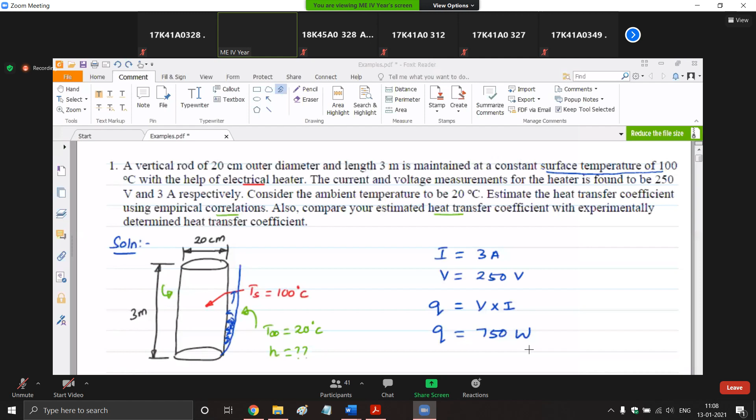Good morning. Sir, yes. By seeing the question, can you please explain how to approach the question, how to solve it?

Yeah, sure, we'll do that in this session. I'll go step by step, I'll try to go slowly. I will go through the question so that you get how to solve it. Okay, we'll do it slowly.

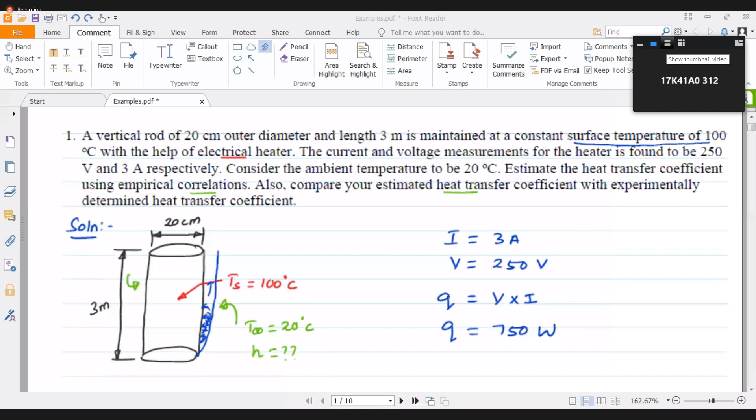So can you give me some basic inputs, sir, so that we can understand very easily? What do you mean by basic inputs? Which means where we have to take specified parameters like CP, FG value. We'll discuss it here, if you have any doubts you can ask. Sure, sir, thank you. Okay, I'll try to break it down as simple as possible.

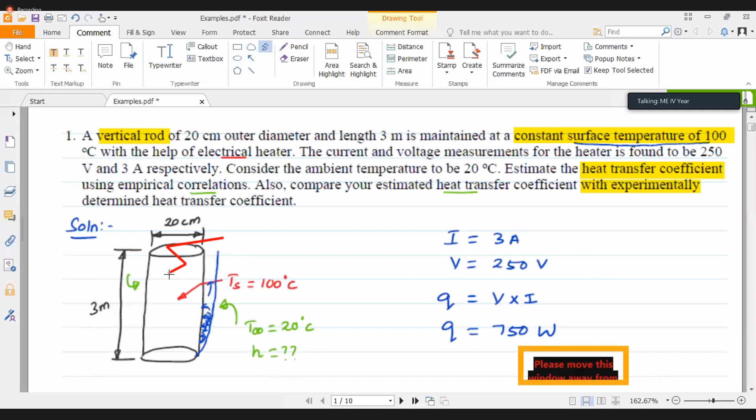So we draw a heater. The input to the heater is given, so you draw V and I, as we have done here, and give the values of V and I. What else is given? It's also given that it's maintained at a constant surface temperature of 100 degrees centigrade, and the ambient temperature is 20 degrees centigrade.

So first of all we have to think about which mode of heat transfer it falls into. There is heat transfer from a solid surface to a fluid, which is nothing but air. So there is convection here — the mode of heat transfer is convection. So first thing we know is it is due to convection.

But which convection is it — free or forced? Is any data given like flow of air over it? No, right? There is no flow of air given anywhere in the question. So this is nothing but free or natural convection.

So you may even improve the diagram — you can draw gravity acting downwards. So this is what is given. Is the question clear to everyone? We have a vertical rod, so it is vertical, not horizontal.

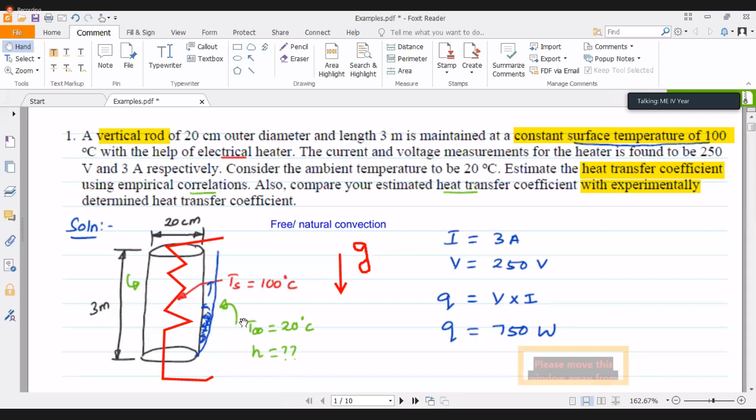We find the properties of air at the film temperature, which is nothing but the average of the surface and ambient temperature. Since the surrounding fluid here is air, the film temperature is the average of the surface temperature and ambient temperature, which is 60 degrees centigrade. So at 60 degrees centigrade we are supposed to find the thermophysical properties of air from the data book — if you open the contents of your data book, you'll see the property values.

Okay, under property values, you have to look for vapors and gases. So once you go to the corresponding page in your data book, whichever edition you are using, go to the contents page, look for property values. Under property values, look for gases and vapors. In the 6th edition, it's on page 33.

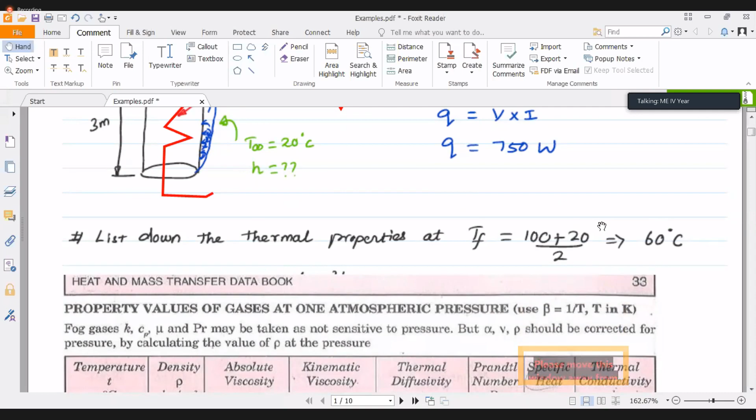So at 60 degrees centigrade, that is at the film temperature, which is the average of surface and ambient temperature, we find the properties at 60 degrees centigrade for air. So the density, viscosity, thermal conductivity, and Prandtl number values are given. I hope you can find this in your data book.

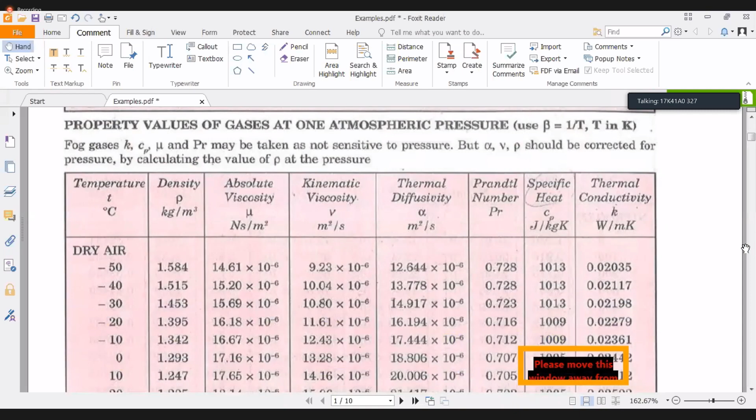Can you get hold of this in your data book? Yes sir, yes sir, I found it. Okay, I hope everyone has got it.

So at this we find the properties. What we have taken, you can take nu, that is the kinematic viscosity, or you can take density and mu, that is also fine. You know the Prandtl number value here is 0.696, and the K value.

I urge you to note it down because it's also your assignment problem, so you can finish one of the assignment problems. I hope everyone is noting down. Yes, yes sir, of course.

Okay, so these are the properties. I hope till now there is no doubt in this, right?

First thing is we found out it is free or natural convection. We found this is for a vertical rod, and the temperatures are already given. From that we found the film temperature, and from that using the data book we have found these properties.

I hope it is clear till now. Any doubts here? No, sir. No, sir. Okay, then fine.

So we find the Grashof number here, because for natural convection, the Grashof number and Prandtl number are the important parameters. If you don't know what number to find, since it's free convection, open your data book, go to convection contents, go to free convection in that, and see what numbers are appearing there, or for the correlations given, what number ranges are required. Generally for free convection we require the Grashof number and Prandtl number.

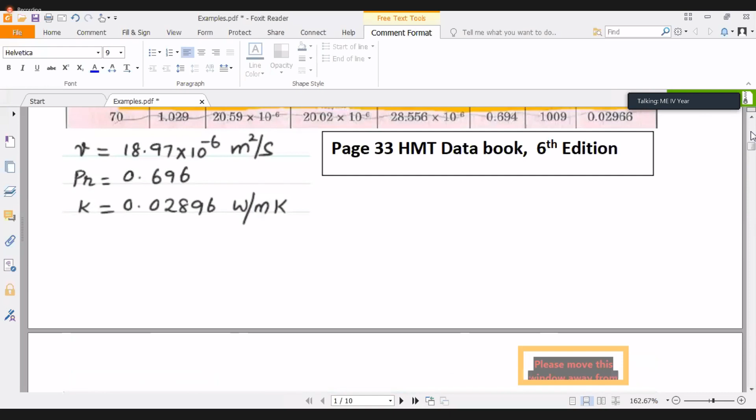And the viscosity value, that is the kinematic viscosity value, we have already found from the data book. It's given by this value 18.97 into 10 raised to minus 6. If you found density and mu, you can also use that to find kinematic viscosity.

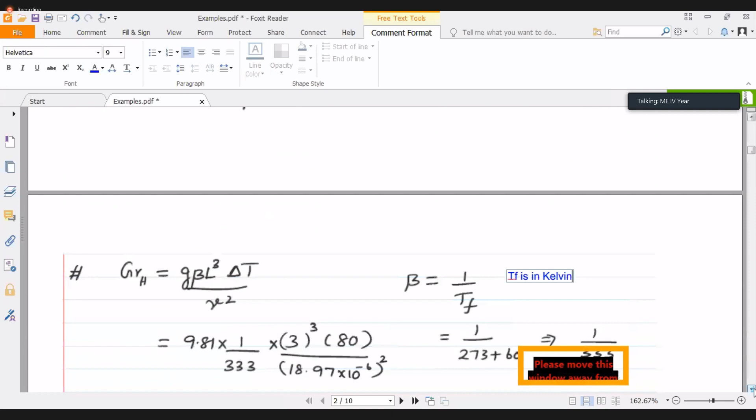Anything is fine. So once we got all these, we plug in the g value. The beta value is nothing but 1 by the film temperature in Kelvin. It's important to take it in Kelvin. It's only for air; for others, the beta values are separately given in the data book again.

The length is the characteristic length, into the temperature difference, and the kinematic viscosity squared. So from this we get our Grashof number value. I hope you get this value, you can calculate and check. I'm not sure whether it's right or wrong, so please check. Now we have to find the Grashof number and Prandtl number ratio.

Sir, yes, go, yes. So you said that for air, beta will be 1 by TF, no sir? Yes. And for other liquids such as water and other things, how could we find the beta, sir? They are given in the data book in some other table.

You want me to specifically tell the page number? I'll put it in your group later. Otherwise, at the end of the class, I will look into the data book and tell you.

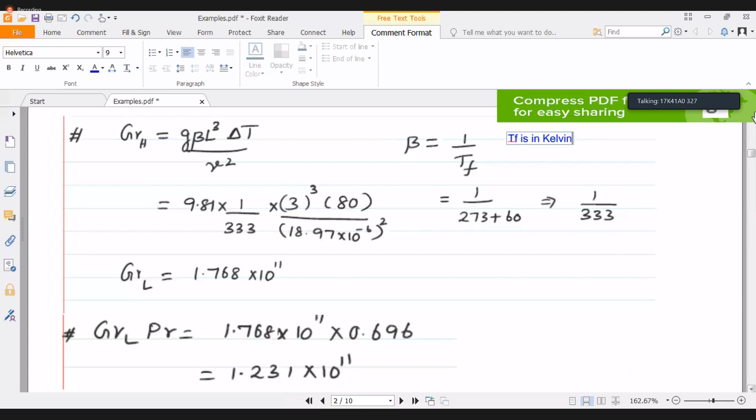So sir, where do we have to take the Prandtl number? It's here only, right, in the properties table. See, this is your Prandtl number. If you go up, this is Prandtl number, right? Is it clear?

Is it clear? Yes sir, it's given. In case Prandtl number is not given, you can find it from mu, Cp and K. Prandtl number is nothing but mu Cp by K. You have mu here, you have Cp values, you can use K values and get that. Mostly Prandtl number will be given in the properties though.

So we find the GrPr ratio. So we need to remember the Grashof number formula. If we couldn't remember the Grashof number formula, where can we find it in the data book, sir?

I think in the correlation itself you will find it, in the free convection section it is given. We'll go to that, I'll show you. But actually you should get hold of the formula. In case not, you can use the data book.

I don't know how they permit the data book, how limited it is in your exams. So it's better to get hold of the idea of the Grashof number. Anyway, it will be there, we'll look into it. So we've got the Grashof number and Prandtl number value.

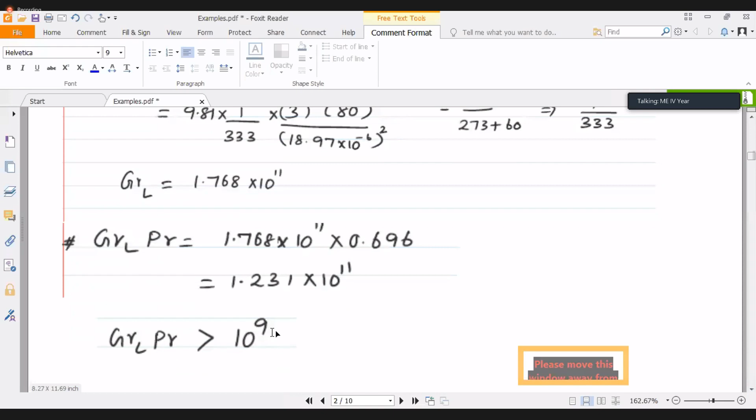So what we do is check: it is greater than 10 power 9. I have written it for some reason, we'll look into the reason now. So we know that flow is turbulent because this is greater than 10 power 9.

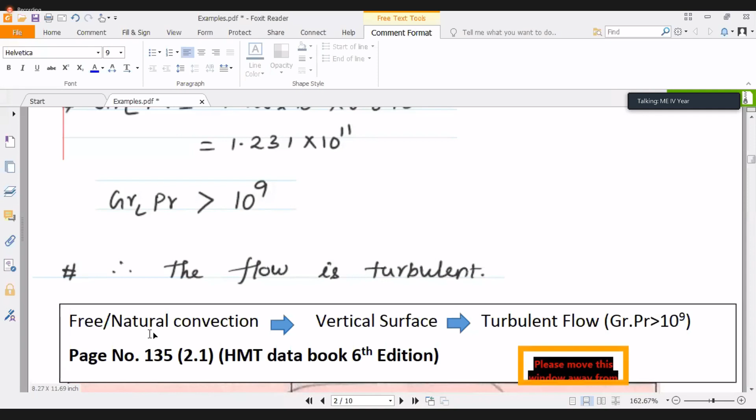So you go to your free or natural convection section in your data book, go to the contents page. Under convection, look for free or natural convection. And how is the geometry of our surface? It's a vertical rod, right?

And you know the GrPr value. Forget whether it's turbulent or not, but you know the range, right? It is greater than 10 power 9, or whatever value you have — it is 1.231 into 10 power 11. So if you look into the 6th edition data book, this correlation is given.

Apart from this, the Grashof number formula will be given somewhere before this also. How to find the Grashof number — someone asked, right? You can find it there in the data book. So this is a correlation we can use to formulate and find the Nusselt number.

So if you don't know which dimensionless numbers need to be found, you can do the problem the other way around. You know that it's free convection, you know it's a vertical surface. You go into the data book and see what numbers are required to be found for it to be used.

Once you know the Grashof number and Prandtl number value, you go to the particular page in the data book. You can use the contents page, look for convection, under convection we know it's free convection, under free convection we know it's vertical surface, and you have the Grashof and Prandtl number value.

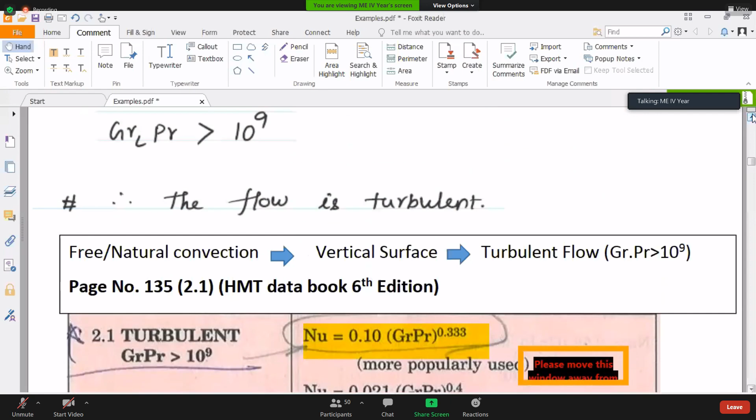Why did we take it as turbulent flow? Generally Grashof number greater than 10 power 9 is termed as turbulent flow. Forget about turbulent flow — you know that this value is greater than 10 power 9, right? We have got 1.231 into 10 power 11, right? Yes sir, of course it is.

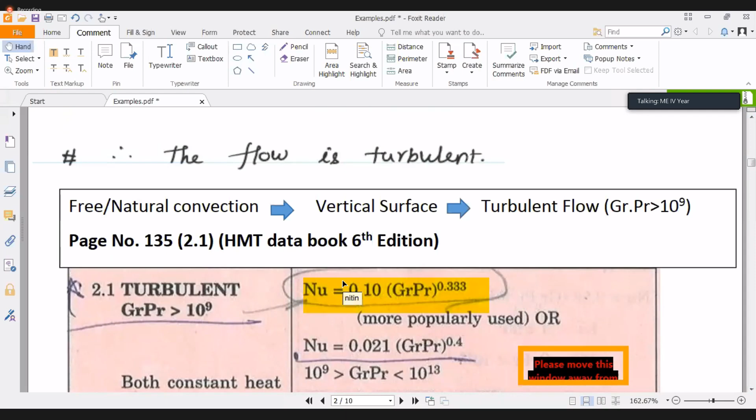So under free and natural convection for vertical surfaces, there will be multiple correlations actually. But depending upon the GrPr value, you have to see where it falls. Your GrPr value is falling well within this correlation, right? So you can use even the first or second correlation, whichever is convenient, and also look at the left hand side.

This is applicable for both constant heat flux and constant wall temperature. Our numerical was constant wall temperature, right? Sometimes some correlations will only be applicable to one boundary condition, either constant heat flux or constant wall temperature. But this correlation is applicable to both.

So you can use this correlation — we are using this, the first correlation here. You can either use this one also, there's no rule that you have to stick to this one, you can use even that correlation. But as it's said, this one is more popularly used, so I have taken this one. Is it clear till now?

Any doubts? Sir, can you scroll up once? I'm noting it down. Sure, I can scroll up. Is it fine here? Yes, sir, okay.

Please use your data book so that you learn. Go through that correlation - could you get hold of the correlation in your data books, whichever edition you are using? I urge everyone to please go through your data book. Whatever edition it is, under convection, free convection, vertical surface, depending upon the value of your GRPR.

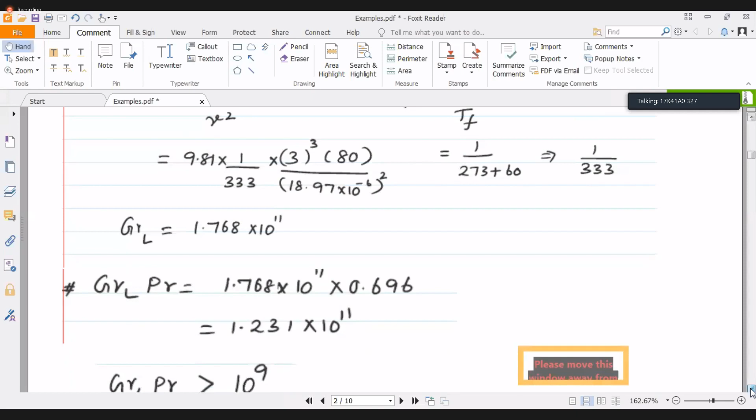So we are finding which flow we have - we are finding the Grashof number, Prandtl number ratio. So we know that depending upon the Grashof number, Prandtl number ratio, this is falling in our range, right? Ours is 10 power 11.

So we can use any of this correlation, right? So it will be under vertical surface, and it's applicable for both constant heat flux and constant wall temperature. Can you find the correlation in your data book? Directly go from the contents page, it will help you.

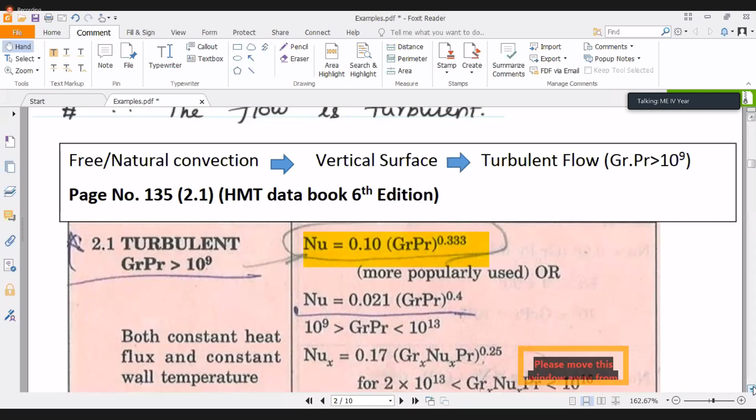So now we know which correlation to use. One more point to be noted: this is the local Nusselt number at a given location, not the average Nusselt number. The average Nusselt number can be found using this correlation - it is nothing but 5/4 times the local Nusselt number. So first we'll try to find the local Nusselt number given by this correlation.

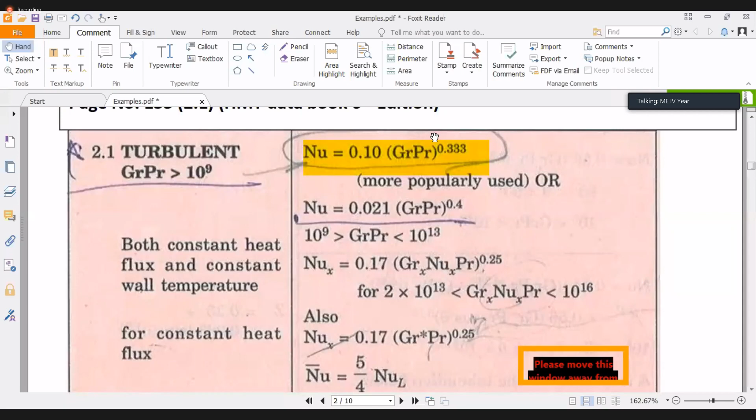So we use the correlation here. We know that NUX is nothing but 0.1 of GRPR raised to 0.333. So if you plug in the value of GRPR, you will get local Nusselt number as 493.2. The average Nusselt number is given as 5/4 times the local Nusselt number as given in the data book, so we get a value of 616.5. It has no dimensions - it's a dimensionless number.

But we also know that Nusselt number is equivalent to HL by K, where L is the characteristic length. Because it's vertical, it is equivalent to the length. If it was horizontal, it will become the diameter of the tube - it is the characteristic length along which the heat transfer is taking place. So from this we can find the value of H.

We have the average Nusselt number, we know the K value from the properties of air at 60 degrees centigrade, and the length of the vertical rod is given. So we find H value, which is about 5.95 watts per meter square Kelvin - it's nothing but Nusselt number into the thermal conductivity of air at 60 degrees divided by the length of the vertical rod. So what we have found is using empirical correlation.

The second step is to find it using the experimental value. We have been given the heater input - we know the temperatures of the surface and the ambient. So the heater input QE should be equivalent to H average into surface area into delta T. This is nothing but the Newton's law of cooling, which gives Q equivalent to the heat transfer coefficient into the surface area into surface minus ambient temperature difference.

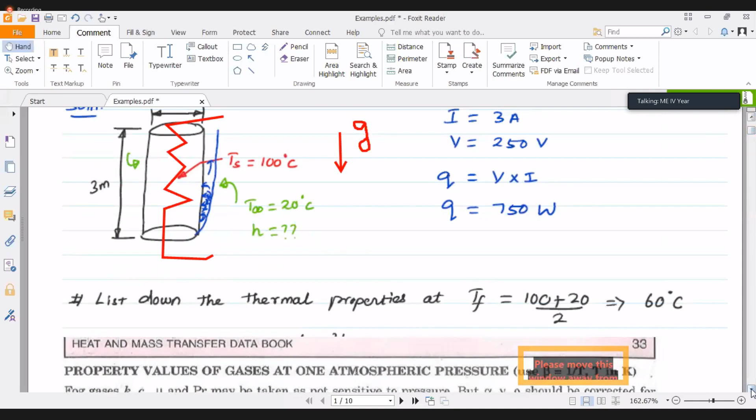How have you taken the K value, sir? Where is the K value? Here - this is properties of air at 60 degrees centigrade, right? K value is 0.02896. Is it clear?

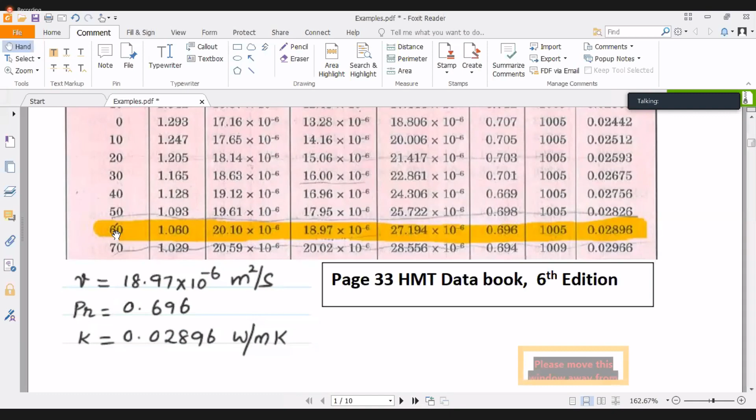Okay sir, is it clear? Here we are taking the values at 60 degrees centigrade at the film temperature.

So the K value is known to us here, 0.02896. Length is also given, diameter is also given. Length is 3 meters, diameter is 20 centimeters. You have to take care of converting them to proper units.

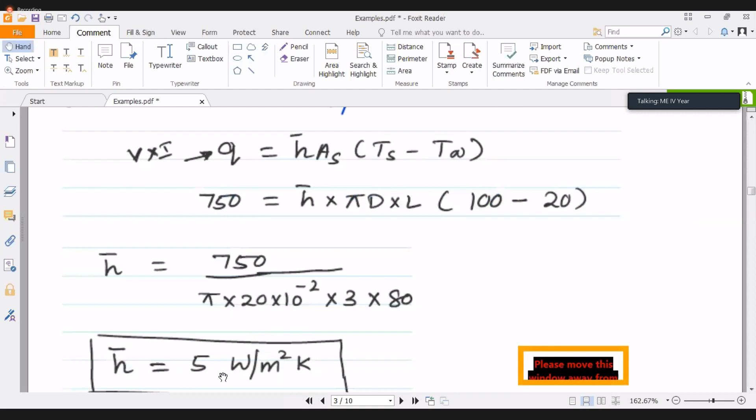Your heater input is also given, so you know the Q value. From that we have found the experimental H value. Q is nothing but H times A times delta T. So from that, and in the Nusselt number correlation we already know K and L, so we could find it using the empirical correlation. Is it clear? Any doubts in this one?

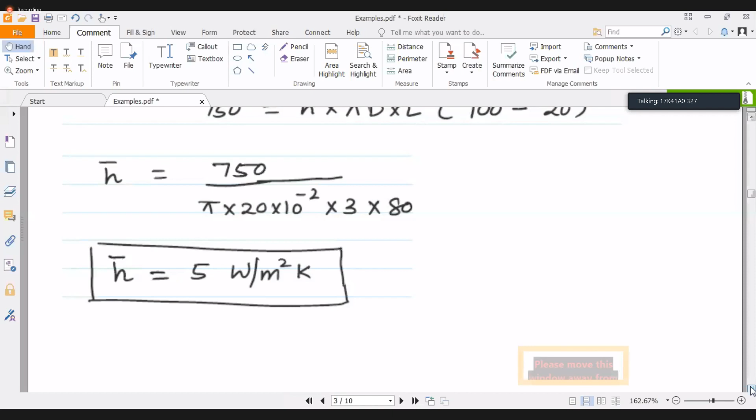Sir, yes. In page number 140, directly the correlation is given, instead of finding Nusselt number. Yeah, what is the correlation? It will be L by K, right?

No sir, 1.31 into delta T whole power 0.33. Sir, I didn't get you. Which page number? 140, sir. Is this sixth edition or which edition you're talking? Sixth edition only, 140, let me go to it. 7.2 sir, that one. Let me look at the correlation you're talking about.

Where is the correlation? Which one you're saying? Calculate sir, GR times PR is greater than 10 power 9, simplified. These are very simplified correlations, right? Simplified expression for convection heat transfer.

Yes sir, instead of finding Nusselt number, we can directly use this. Yeah, but we don't use this correlation because the error may be even high. These are very simplified correlations. We don't use it sir, but the correlations are getting the answer near to the value, sir, 5.56 we got. Whatever it is, but this is a very simplified correlation.

If you use this, it doesn't make sense, right? If you don't have much data, then you can use this correlation. If you don't know the properties, if you don't know other things, then you can use this correlation. Don't go for the simplified correlations.

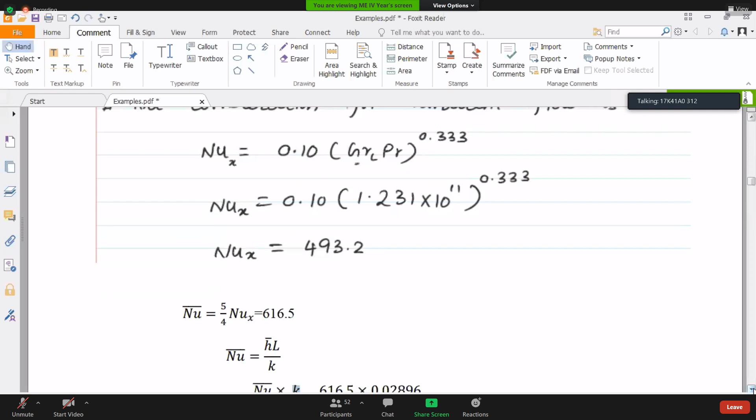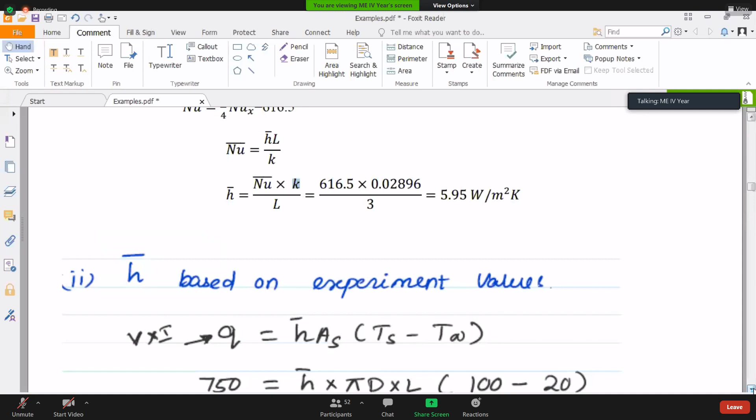Is it clear? Yes, it is clear, sir. Okay, don't go for the simplified expression. If maybe you are writing an exam without a data book, you can remember that formula, which is simple to remember and write.

Once you have the data book... Sir, regarding the HT lab, could you please provide the results of the experiment based on the readings you have given? We'll compare it with the readings we have got. I'm not sure because I don't have the books with me right now, I don't have the manuals with me.

Okay, so how do we make sure that we have got the correct values, sir? See, that's what I'm saying. You compare your experimental and theoretical values. It may be far off, you just have to ensure that you've done the procedure right. Don't worry about the numerical values.

Convert them to proper units, that is the first thing, and look at the procedure you're doing. If you're procedure-wise right, and if you converted all the units, you should get the proper answers. And most of the problems you are comparing, you have to find the values theoretically and also experimentally.

Okay, so let's not mix with this one now. We'll continue this part and try to finish this. So this is similar to what you know, sir.

I have a doubt, sir. For the lab external exam, are we allowed to bring the data book, sir? So what might be the procedure in the lab? You bring the data books along with you. If they don't permit, they may give their own data books. If they permit, you can use your own data books, but you carry them with you.

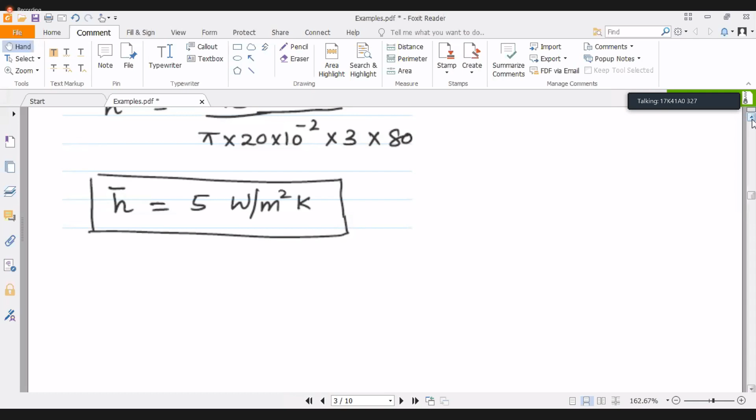So the question is about free convection over a vertical surface, right? Yes. In a vertical surface we have taken the free convection chart, and from that we need to get the Grashof number formula, the Grashof number and Prandtl number ratio.

Once you get the Grashof-Prandtl number ratio, you look for what range it is falling in. Here it is falling within this range, 10 power 9 to 10 power 13. So either this correlation or this correlation you can use. As the first one is more popularly used, we have taken it.

If it is less than 10 to the power of 9, what will be the procedure, sir? Just above this, there will be other correlations available in your data book. You have to scan where your Grashof-Prandtl number range is falling. Maybe it is less than 10 power 9 — you have to look in your data book.

Above it, I think it will be laminar cases. Yes, it will be laminar. You check the range there, check whether it's falling in that range, and then you can use it.

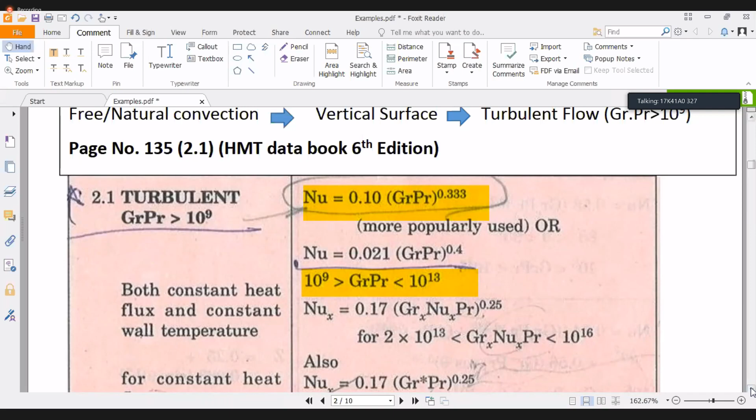Okay, clarified. I just cited the one required here because I think it would be difficult to put the entire data book here.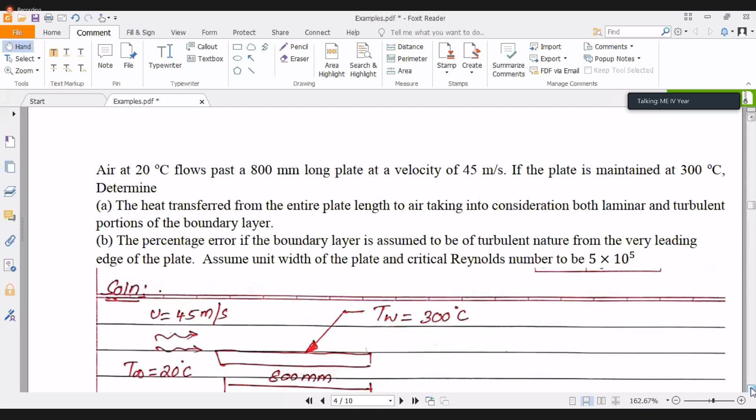So let's move to the second problem. I think this is also part of your assignment, maybe question number 7. So what is given? Let's break the problem down first.

It's given that air at 20 degrees flows past an 800-mm long plate at a velocity of 45 meters per second. I think it should be a horizontal plate here; that data is missing. So the velocity is given.

If the plate is maintained at 300 degrees centigrade, determine the heat transferred from the entire length of the plate to the air, taking into consideration both laminar and turbulent portions of the boundary layer. So you have to consider both portions of the boundary layer.

And the second thing is the percentage error if the boundary layer is assumed to be turbulent in nature from the very leading edge. It's turbulent from the very leading edge, and the critical Reynolds number value is given as 5 into 10 power 5.

So what is given here? It's given that heat is being transferred from a plate which is 800 mm long to air flowing at a velocity of 45 meters per second and at a temperature of 20 degrees centigrade. So which mode of heat transfer is it?

Convection, right? But it's forced convection, right? Because there is air flowing at a velocity of 45 meters — so there is an external source, a flow of air. This is forced convection, right?

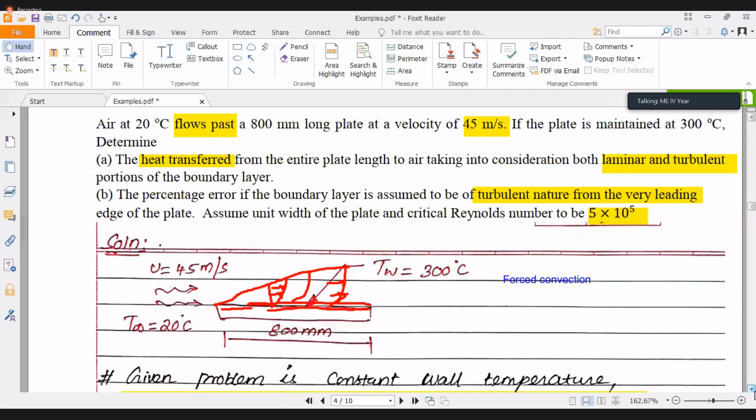It is not confined by walls. The flow is not confined by walls. It is not flowing through a tube or duct.

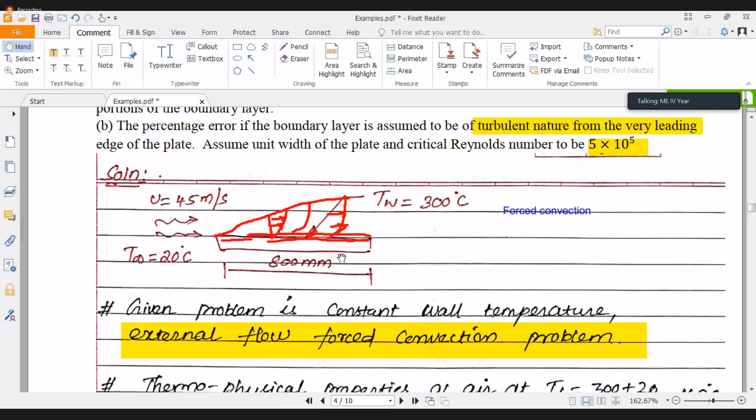So the first step we do is find the film temperature, which is the average of the wall or surface temperature plus ambient, divided by 2. So we have the film temperature as 160 degrees centigrade, and here we have air as the fluid.

So we go to the data book, page 33, for air properties. Look for the values. What temperature are we looking for here? It's 160 degrees centigrade. So at 160 degrees centigrade we find the property values.

So at 160 these are the values given. Correspondingly you can look at what is what - this is specific heat, thermal conductivity, Prandtl number - and you can note down the values you need according to the formulas required. Maybe you need viscosity, K value, or Prandtl number value. So you note down those values at 160 degrees centigrade.

So on page 33 of the 6th edition you can note down the following values. I noted the kinematic viscosity, the K value, and Prandtl number. You can even note the density and mu, and use them to find kinematic viscosity.

So what we do is find the Reynolds number, since it's a forced convection problem. Reynolds number is given as density into velocity into the characteristic length, divided by mu. But I am replacing mu by nu, since nu is nothing but mu by rho. So the density is brought to the denominator because I found the kinematic viscosity property directly. It is nothing but rho into velocity into characteristic length.

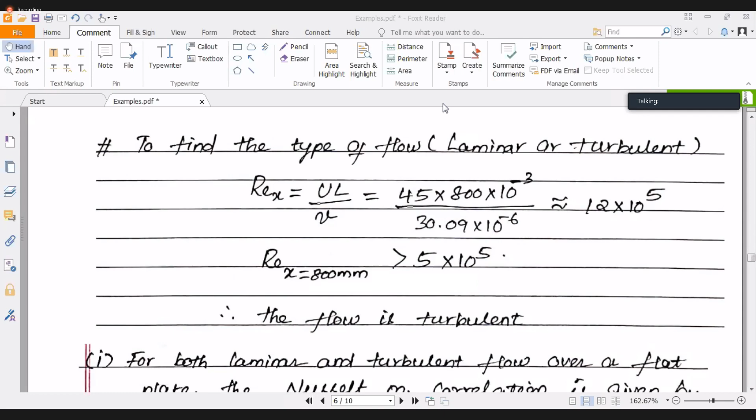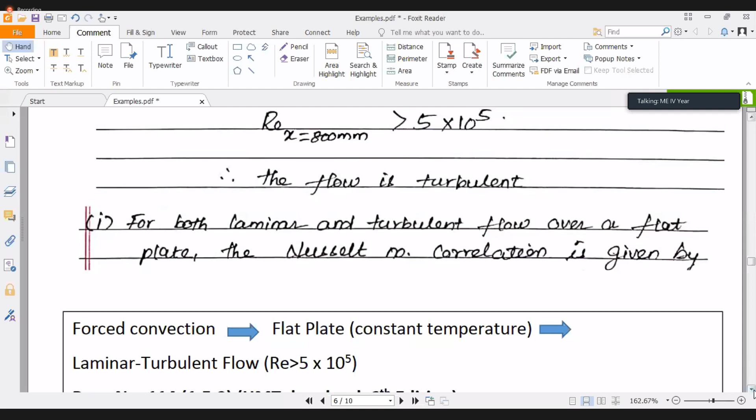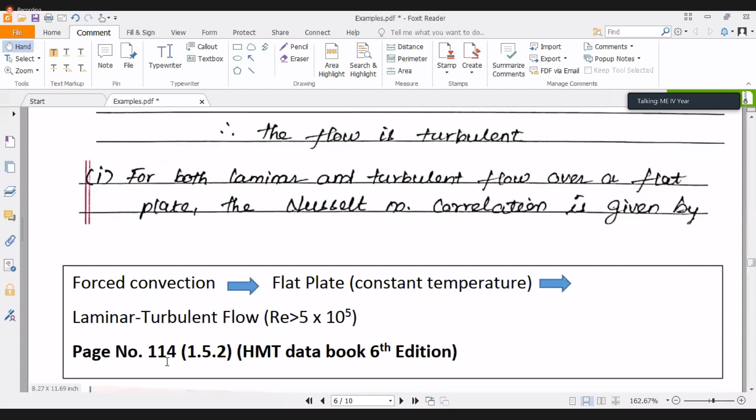So for the first case we have to find, for both laminar and turbulent flow over a flat plate, the Nusselt number correlation. So what we do is go to convection, then force convection, in your data book. Under force convection, look for flat plate. Under flat plate, look for the constant temperature case, and find a correlation for the laminar and turbulent flow region that considers both laminar and turbulent boundary layer. I believe it is on page 114 of the 6th edition data book.

See this correlation here on page 114, equation 1.5.2. This is for constant wall temperature, and our case was constant wall temperature, considering both the laminar and turbulent cases. So this is the correlation we are looking for in the first problem. Yes.

So what is the correlation given? The correlation is given as Nusselt number equal to this expression, applicable for this range. Check whether we are falling in this range or not, whether your Prandtl number satisfies this or not, whether your Reynolds number satisfies this or not. Then you can use this correlation. This is for forced convection, flat plate, for both laminar and turbulent, under constant wall temperature condition. So we found the correlation to be used, and we'll use this correlation.

We already have the Reynolds number value, and we have the Prandtl number value from the data book. If you have not noted, I ask you to note down the properties here: the K value, Prandtl number value, kinematic viscosity value. Have you noted these values? Yes, sir. Okay, so can you just scroll up to note the values, or do you want to look at the data book? Not data book, sir, this one.

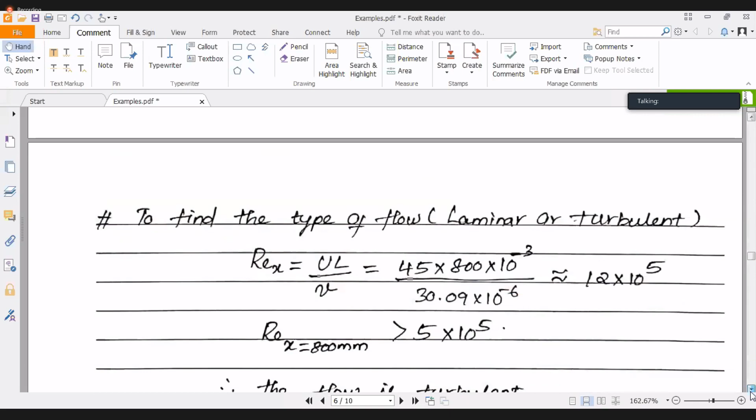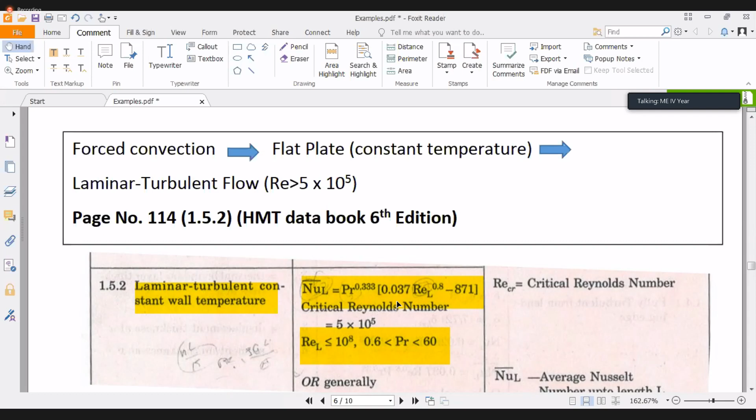So once we found the Reynolds number for the first case, he is asking us to consider both laminar and turbulent boundary layer. So use your data book under convection, forced convection, flat plate. Look for the constant wall temperature case, but this is the constant wall temperature case, and we are considering both laminar and turbulent. So we get hold of the correlation to be used.

So use this correlation and get the value of Nusselt number: Prandtl number raised to 0.33 into 0.037 into Reynolds number raised to 0.8 minus 871. I guess this value should come out around 1611.14. And once you get Nusselt number, you can find the H value.

Nu is nothing but HL by K. Here L is the characteristic length again, the 800 mm converted to proper units. So once we get Nusselt number, we find the H value. The H value is given as Nu into K by L. The K value we have noted for air at 160. The length we know. So if we plug in all the values, we'll get the average heat transfer coefficient.

Once we get H, we are supposed to find the rate of heat transfer. So Q is nothing but H into A into delta T. Here A is the surface area. We assume a unit area in the other direction, perpendicular to the paper, so we take it as 0.8 into 1. We are taking a unit area because the data is not given, or you can find it for unit length - dividing by the other dimension which is not given, into the temperature difference.

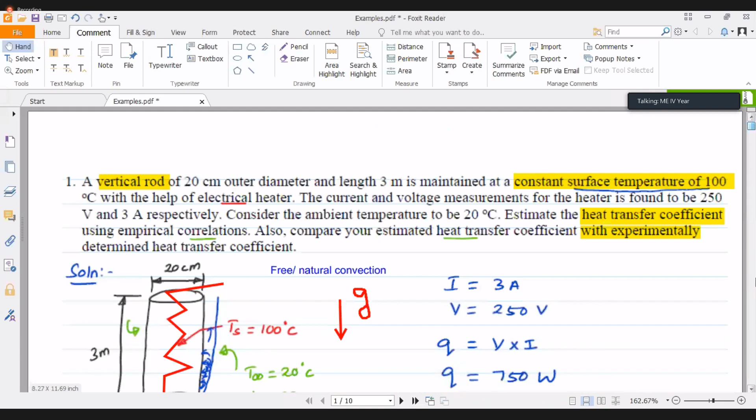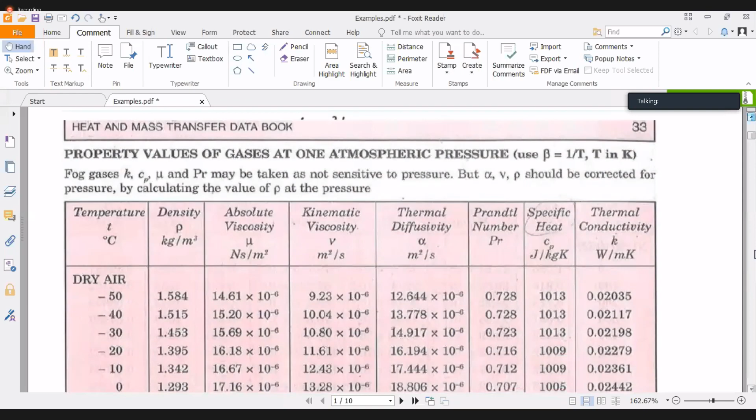Can't we take both as one, sir? This is given as 800 mm, right? How can you take it as one? This is given, sir, 800. Yes, sir. If anything is not given, we can take it as one, no sir? What you're saying is, if any data is not given about the dimensions, then we can take area as one - yeah, you can take it as one. But here this length is given, right? 800 mm is given, sir. Perpendicular to the paper, you can take 1 unit, or you can find the Q value per unit meter.

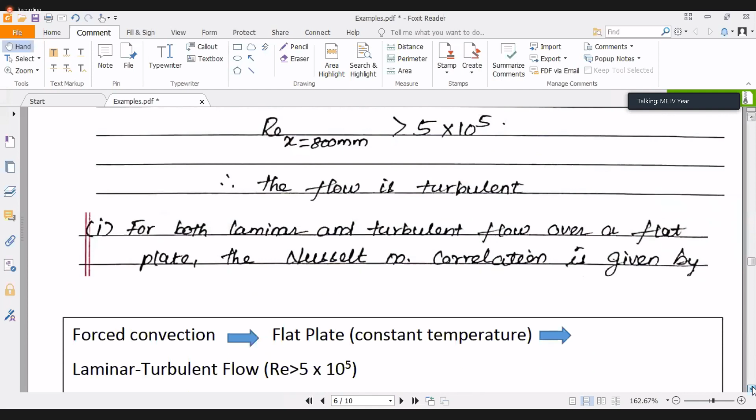Anything is fine. So using that, we get Nusselt number. From Nusselt number, we use Q equal to H A delta T. You can take A as 1 and remove the meter part here, or you can write it as Q prime and keep the meter part, whichever is fine for you. So you can take it as 1, and Ts minus T infinity is nothing but 300 minus 20, which is 280. So from this we get the Q value.

So similarly, for the second case, they are asking us to find the answer assuming it's completely turbulent. What I found is page 113 is missing in your data book's soft copy. If anyone is having a hard copy, you can find the correlation in that, assuming it to be completely turbulent.

Okay, so I'm just showing you the correlation, assuming it to be completely turbulent. From this we again get the value of H, and from this you can find Q again and compare what is the percentage error.

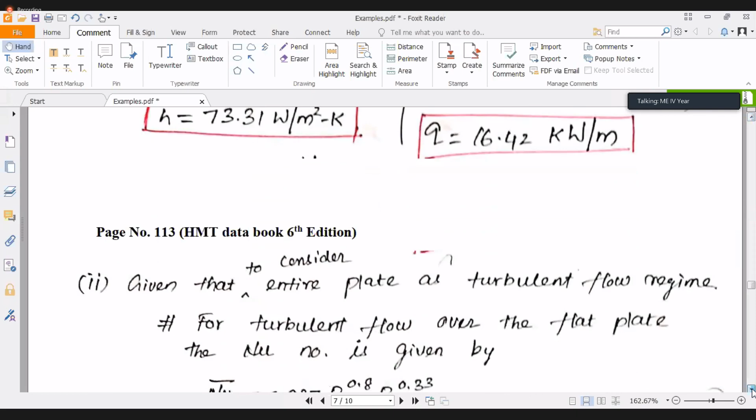So we have found Q here and H here. We are finding H again, assuming it to be fully turbulent. This is the correlation we use. From that we find H again using Nu into K by L. K is thermal conductivity, L is the length of the flat plate.

I haven't done it here. Yes, you can find Q again and compare the Q, or whatever error, percentage error you are getting.

So we'll go to the last example, and we'll stop after this. Sir, look at the problem. Shall we note it down, sir?

Note it down? Yes, sir. Let me scroll up. Okay, I haven't finished here. You have to find Q again using this H value and compare the Q with the earlier one, sir. Please show the earlier Q. Scroll up, compare sir. Find Q again here using this problem.

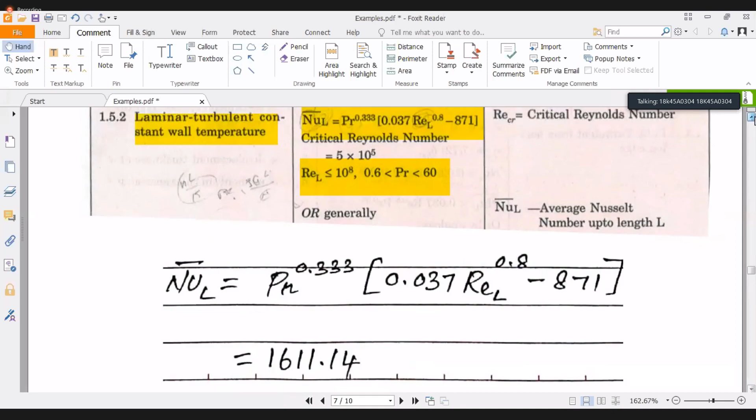You want me to scroll more? Is it fine? Yes, sir, scroll more. Okay, this correlation. Even more, please hold on, sir. Where are you? Reynolds number calculation. Even more, sir. Where were you till now? Sir, you said you will be sending this document, no?

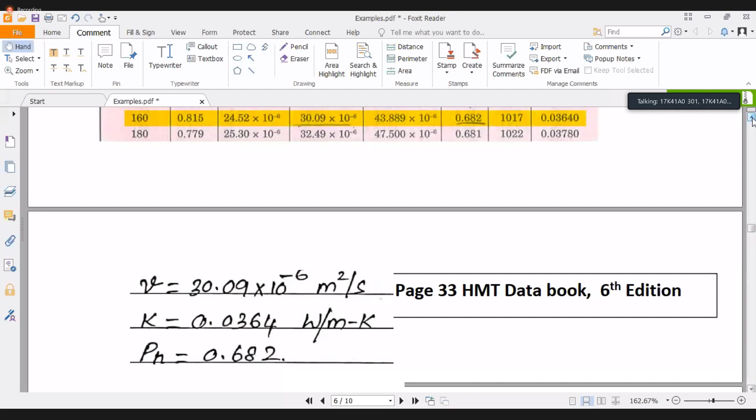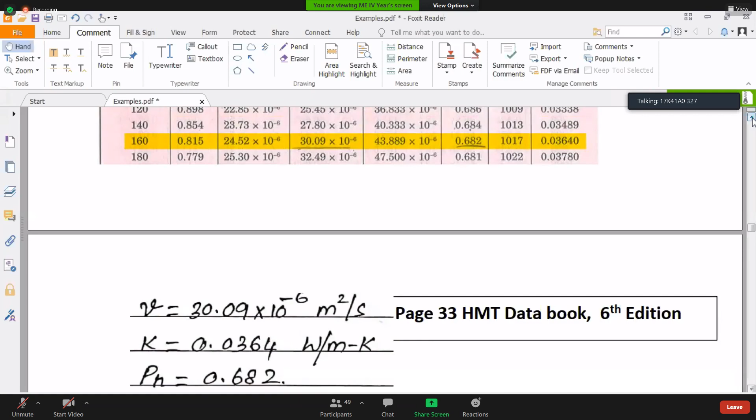You can note it down. Actually, this is over, right? Down, down, I mean, yes. I'm scrolling down. This calculation, this particular, Reynolds number.

Yes, sir, could you explain how to calculate it? Actually, do you want me to solve the entire assignment for you? No sir, just explain. Sir, could you extend the time for the assignment, sir?

I think today is the deadline, right? No sir, but in Canvas it is showing that the end time is tomorrow. What? Tomorrow? But in Canvas, it is showing the end time is tomorrow. No, I think today is the end time. You can check actually. Yes sir. Could you extend? Today is the deadline for the assignment, stay, and tomorrow is the deadline for submitting records, sir. Is it so? I have to check which is what.

But whatever it is, see, you try to finish it early, you will be free. Almost we solved the two numericals here. First two numericals are very simple: composite slab and composite cylinder. The last one is heat exchangers. You just have to draw and write the classification of heat exchangers. Other than that, I think one fin problem and one transient heat conduction problem is there, right?

Yes sir, the transient heat conduction is nothing, it's a simple correlation. The temperature difference will be given by E power minus, depending upon the Biot number. You just have to use a formula and plug it in there. There is nothing special in that problem actually.

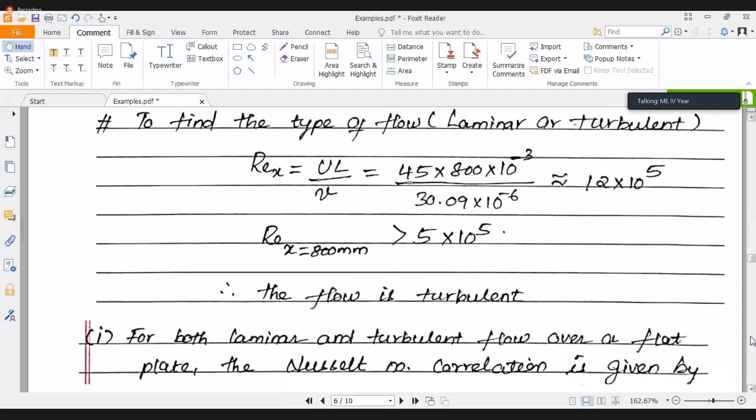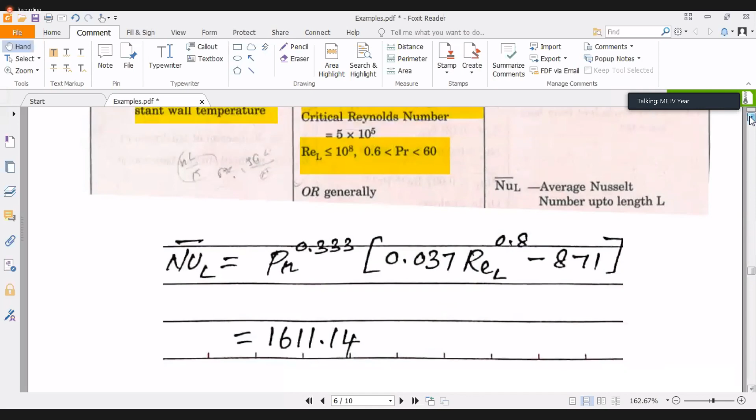I hope you have noted this down. Yes sir, please scroll down. Yeah, this is the correlation for the laminar turbulent region, that is the first part of the question. You may note it down and scroll up.

So, okay, then from that we find the H value. Sir, in place of T infinity 20 degrees, we have to take now 280. This Ts minus T infinity, 300 minus 20, right? Oh okay, the wall temperature or surface temperature minus ambient.

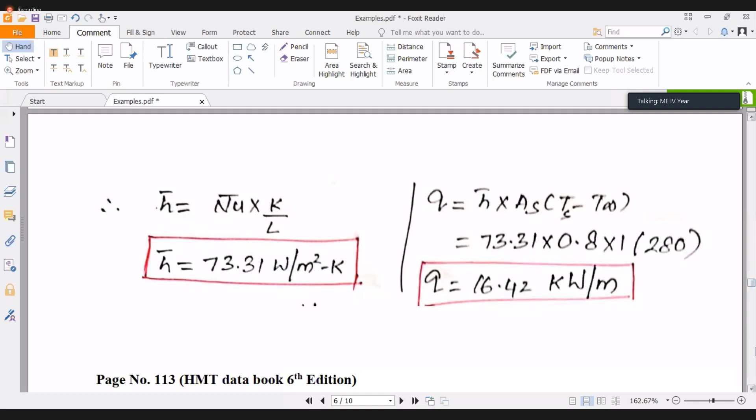This has to be delta T. This is the potential for heat transfer. Delta T is the potential for heat transfer. It can't be T, it has to be delta T: Ts minus T infinity, 300 minus 20. So you have to have some sense of it. Okay, just don't copy it.

So in that we assume it to be entirely turbulent, and we take this correlation. In the previous problem, we had both laminar and turbulent. Oh, that was okay, fully turbulent. That was only turbulent, right? In that question, they didn't ask anything specifically; we found the range, and according to the range, we found it to be turbulent. The Gr Pr value greater than 10 power 9, and we use that particular correlation. Oh yes, sir. Okay, depending upon the Gr Pr value, we will use that correlation.

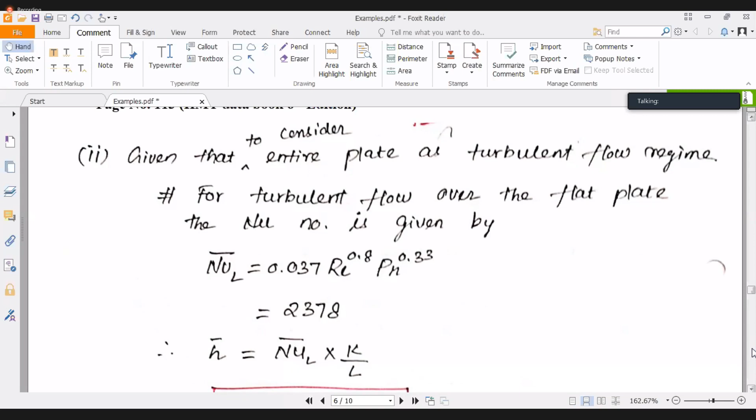Okay, so we plug in these values, we get this H bar value. From this, you have to again find the Q. I haven't done that part here. Okay, 24.23 we got, sir.

24.23. What was the earlier value? Earlier value is 16 point something, sir. From the previous value, you can find the percentage error.

Shall we move to the next? Okay, done. So we'll move to the next numerical. I think this is the last one. After this, we'll stop.

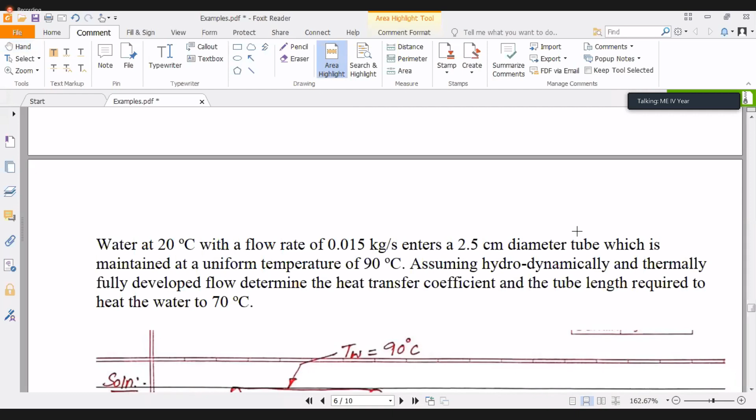So what is given is water at 20 degrees centigrade with a flow rate of 0.015 kg per second enters a 2.5 centimeter diameter tube, which is maintained at a uniform temperature of 90 degrees centigrade. Assuming hydrodynamically and thermally fully developed flow, determine the heat transfer coefficient and the tube length.

So what are we supposed to find? We are supposed to find the H value, that is the heat transfer coefficient, and also the tube length required to heat water to 70 degrees centigrade.

So water is entering at 20 degrees centigrade, coming out at 70 degrees centigrade, and the tube is maintained at 90 degrees centigrade. The tube diameter is given, but the length of the tube is not given, and the flow rate of water entering is given. So this is the data given.

So under which category does this come? Internal convection. Convection internal flows, because it's within the tube, there's a flow, and heat is transferred from the wall of the tube to the water which is entering.

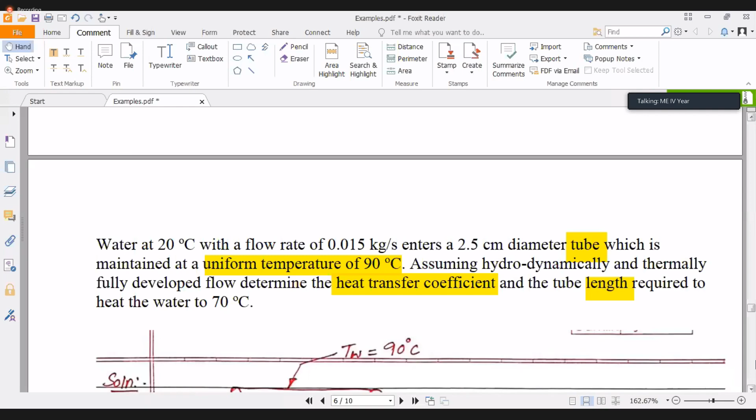So we sketch it. What do we have at hand? We have a tube whose diameter is given. The diameter is 2.5 centimeters.

The inlet temperature of water is given, the outlet temperature of water is given, the TW value is given, the mass flow rate is given. The length is unknown, and you have to find H, right?

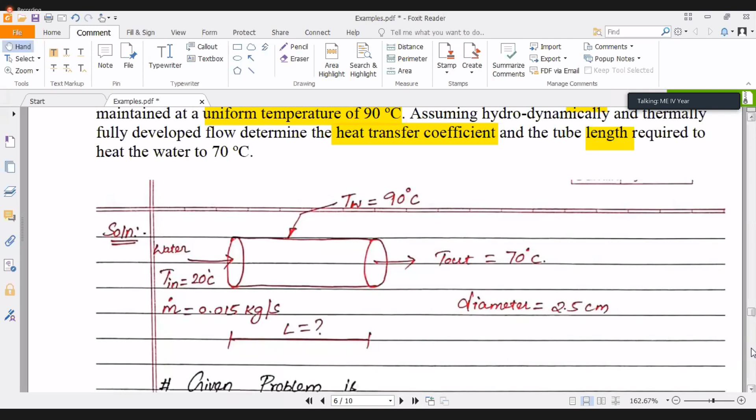So what are we looking for? We are looking for forced convection, flow through a pipe, that is internal flow, with constant wall temperature. For flow through pipe problems, the Nusselt number is generally constant if the flow is laminar. I just wrote this point because in our case it is laminar.

So the first thing is we look for water properties. I think it's on page 21. So we find it at the inlet conditions, fluid properties with respect to the surface and all. I think here is 45.

Okay, so there's something we need to discuss here. In the data book, the values are given only at 40 and 60, right? But we are supposed to find the property set at 45. This is T in plus T out, not T surface - that would be wrong. This is T out. So this has to be at 45, but we only have values at 40 and 60.

So how do we find the value at 45? Yes, interpolation. You have to do linear interpolation. I am not going to teach you interpolation here. I hope you know how to do it. If not, please refer to your basic mathematics textbooks on how to do interpolation.

I think from that you can find the properties of water. One more thing I want to share: suppose this value was somewhat 42, and the film temperature was 42, and you don't have time in your exam, you can take the values which are nearer. Suppose it was 42, I can take values at 40 degrees.

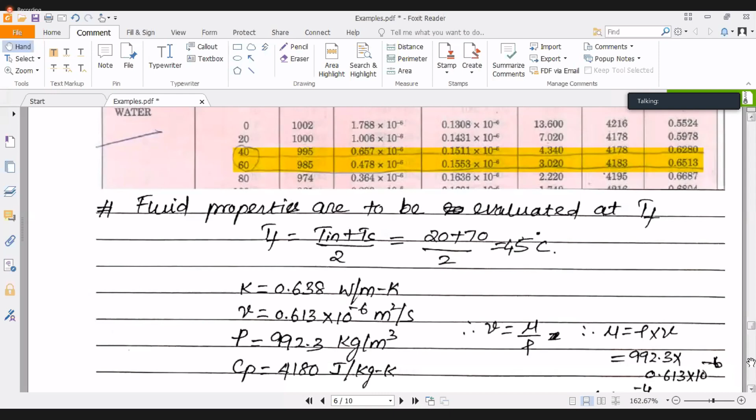So what is the first step? We have to find the Reynolds number, because it's forced convection. Reynolds number is given either by rho Vd by mu, or V d by nu, or if in terms of mass flow rate, it's given as 4m by pi d mu. This is how we give the Reynolds number.

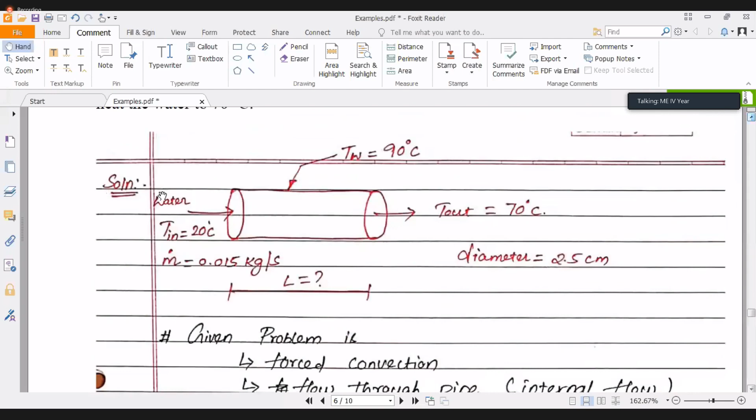The mass flow rate is given, since it is internal flow through a pipe. It is flow through a pipe inside, which is what we have written here. Forced convection, flow through pipe, internal flow, and constant wall temperature.

We have to look for the correlation according to this: forced convection, internal flow through pipe. You also know the geometry, right? It is circular, that is a tube, and it's constant wall temperature.

You have to find your Reynolds number to know which correlation to use, so we can get the correlation based on the Reynolds number value. This is less than 2300, so this is laminar. Reynolds number less than 2300 for internal flow is considered to be laminar.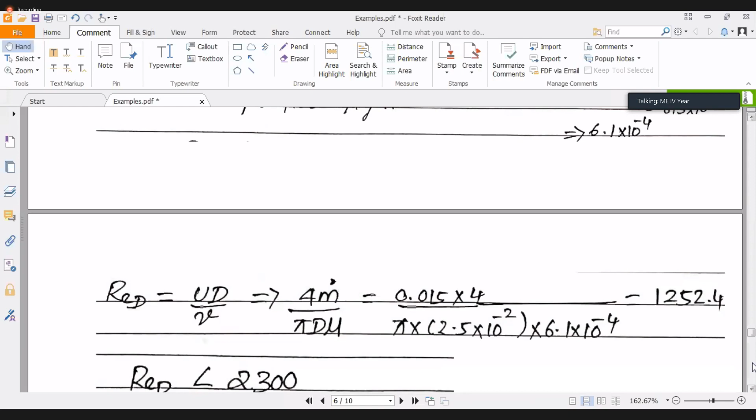So you go to your data book again: forced convection, internal flow, tubes, laminar, Reynolds number less than 2300, and constant wall temperature.

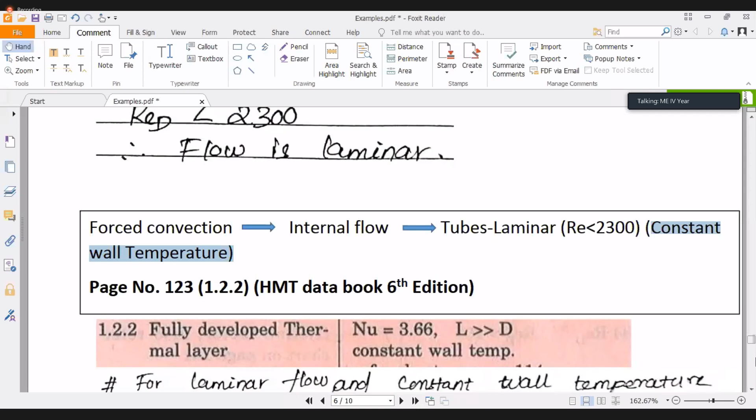This is also important. Some correlations may be specifically for constant wall temperature or constant heat flux, while some may be applicable to both conditions, like we've seen earlier. But here, for constant wall temperature and constant heat flux, the conditions are different, so you have to be careful and check what is given in the question.

In our question, the wall is maintained at 90 degrees centigrade, uniform temperature. So we have to look at the correlation for constant temperature.

Go to page number 123, section 1.2.2, 6th edition. Find the correlation for laminar condition, since your Reynolds number is less than 2300, and we are assuming a fully developed thermal layer, or it's already given in the question. If not, you can make that assumption and use the correlation.

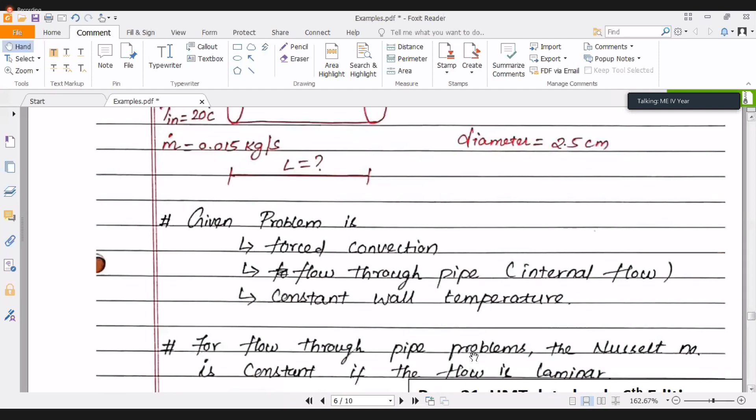So the Nusselt number value is given as a constant, which is what I tried to write at the beginning of the problem. For flow through pipe problems, the Nusselt number is constant if the flow is laminar. Even for constant heat flux, it will be a constant value, but this particular one is for constant wall temperature.

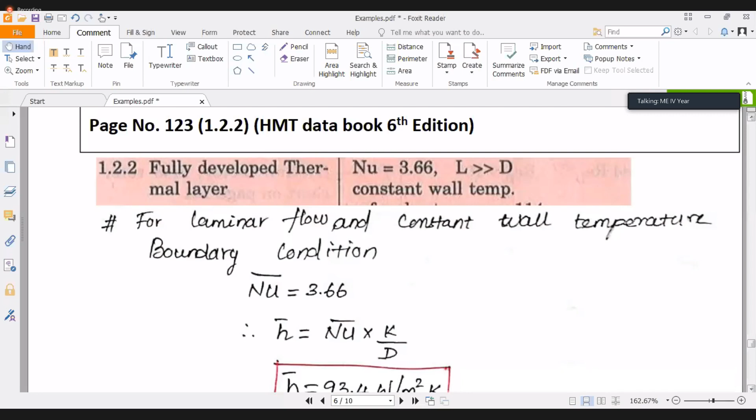So we know the Nusselt number value here, from which we can get the H value. The diameter of the tube will be your characteristic length here, because it's flowing through the tube. So you plug in the values, you know the K value, you know the D value, and from that you can find H. So H is about 93.4 watts per meter square Kelvin.

Apart from that, we can also find Q, the heat transferred, using the correlation m Cp delta T. You know the mass flow rate, and the Cp value can be found at the mean temperature of the fluid, that is T in plus T out by 2. There you can find the Cp values from the water table.

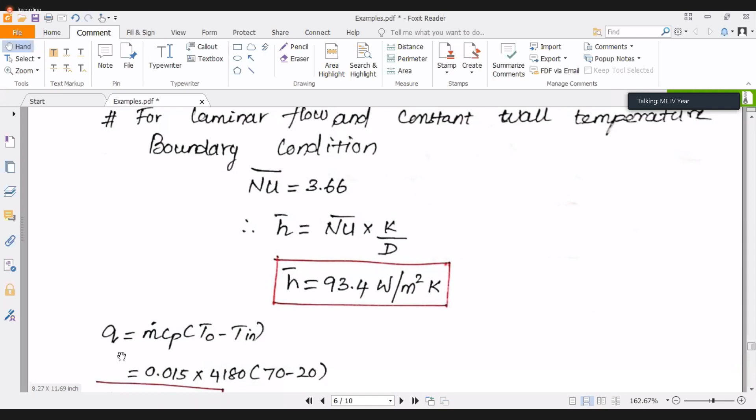The T out and T in values are given for the tube as 70 and 20, so from this we can find Q using a steady state approximation. We assume that at steady state there is no heat loss to the surroundings, so the total heat is transferred to the fluid. Whatever heat is given by the surface is absorbed by the fluid, so Q can be given as m Cp delta T. So we get Q out of this as 3135.

So what we do next is we have to find the length required to make the fluid reach 70 degrees centigrade, entering at a given mass flow rate and 20 degrees centigrade, to reach 70 degrees centigrade. So we know H, we know Q. Can we find length from this? We know Q, we know H. What is Newton's law of cooling?

Newton's law of cooling, Q is nothing but HA delta T, HL delta T. But here your delta T will be the log mean temperature difference. So you have to use Q equal to HA delta T, as the fluid will keep varying its temperature along the length. You can't take a mean value at any instance. So we go for a log mean temperature difference.

So how do we find the log mean temperature difference? The greater difference and the lower difference between those two divided by the logarithm of that will give the LMTD. The surface area is nothing but pi d L, and the d has to be the inner diameter, because the flow is taking place inside.

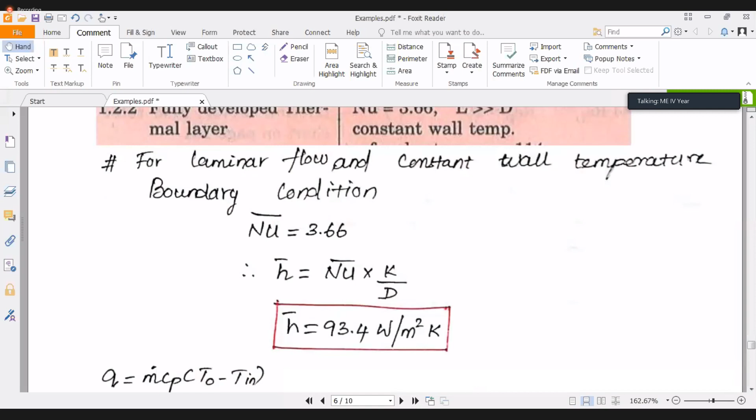So from that you can find the length. Q is nothing but HA delta T, you plug in all the values and find the length. So the length is about 10.71 meters.

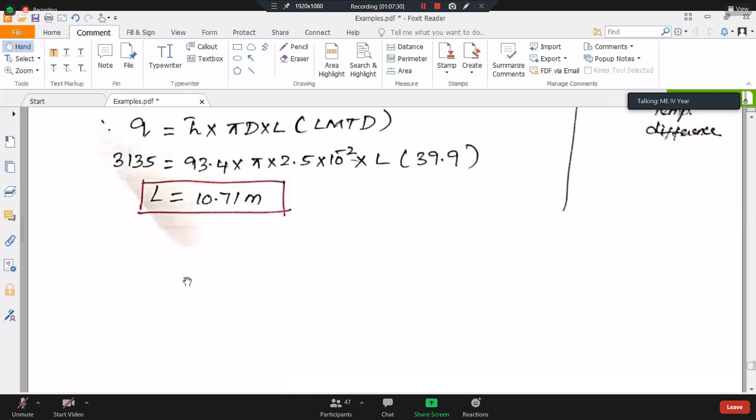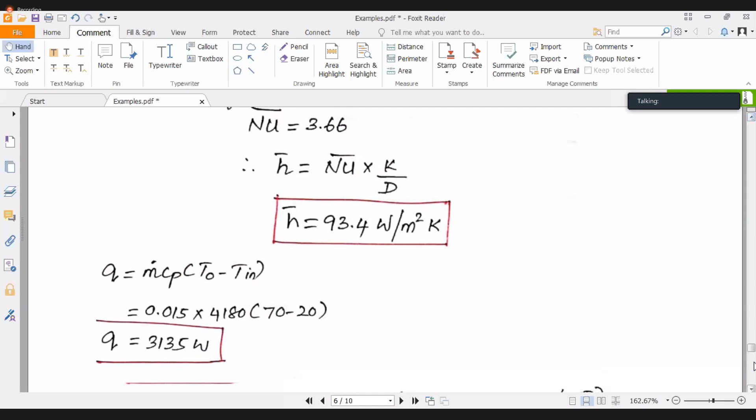Sir, can I move up? Yeah, sure. Is it fine here, or shall I move more? No sir, one page down. Move up, down or up? Down sir, down. Here, further down. Further down sir, okay.

Is it clear? I hope you must have got a hang of how to use the data book. So the first important parameter is you should read the question very carefully. Once you read the question, try to depict it using a picture, you will solve half of the problem. You'll come to know what kind of geometry it is, what mode of heat transfer it is, and under convection whether it's forced or free convection, and whether it's internal or external.

Write all the temperature values there and find the respective properties, then go directly to the heat transfer data book and check which dimensionless numbers you have to find for the correlations to be used. If it's free convection, obviously the Gr Pr range is given, so you have to find the Grashof number and Prandtl number value there.

If it is then less than 10 to the power of 9, it means laminar. If it is greater, then whatever range is applicable.

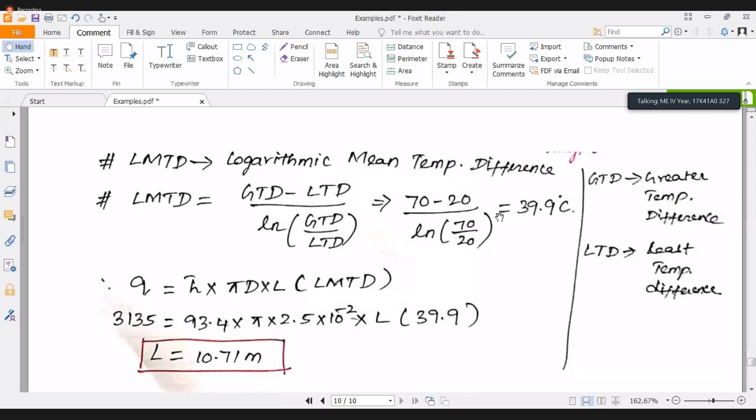Sir, can you share this file? Sir, small request, post important formulas. Yes, see, all formulas are in your data book, right from the thermal resistance to everything. All formulae will be in your data book. Every formula there will be in your data book. But I don't know why you haven't seen the data book till now. You're supposed to start looking into the data book right from the beginning of your heat transfer course.

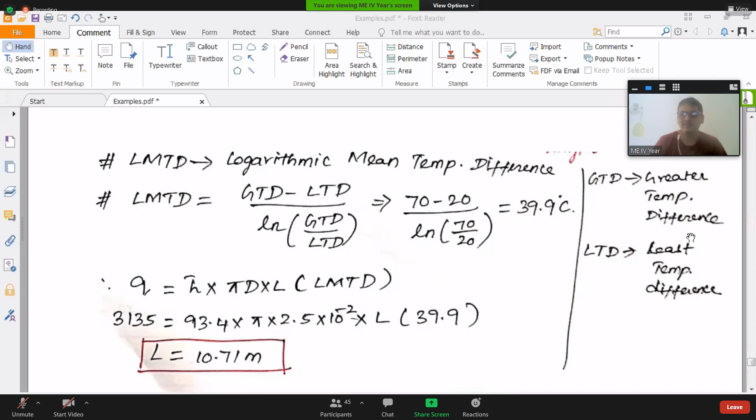Sir, but share according to the sequence of the syllabus, sir. You want me to arrange them and share, or what? Yes sir, not like that, sir. Okay, I will do. I will at least write the title there, right? You need not worry, I will write the file name according to the title. Okay sir, okay sir, okay.

So whatever I have, I will look into that. Whatever I can provide to you, I will give you the numericals. But I don't know how your exam pattern is, whether the questions will appear in the exam or not. I don't know anything about that.

So we have 8 questions, from the 8 questions we need to attempt 5 questions. Okay, I don't know about any of this. Each question carries 14 marks, so 14 fives are 70.

Actually, I got some old question papers from the department yesterday, but I think the pattern is completely different from what you are saying. Maybe it was for old batches. So I will pass that question papers also.

After the pandemic, the paper pattern is changed, sir. Earlier it was only 2 hours. Okay, what I will do is I will share these earlier question papers and these numericals with you guys, maybe 16th or 17th, after the lab session, whenever I can compile, I will compile them and give it to you guys.

Thank you sir, thank you. Shall we stop here? Yes sir. Yes sir, chalo, okay bye.

Any doubts? Please conduct the sessions like this in the future also, sir. I mean, before the examinations, it would be very helpful to solve our doubts.

See, I will give you this material, whatever material I have, I will give you. In case you have any problem, you are not able to understand from that material also, then we will have a session, okay? Okay sir.